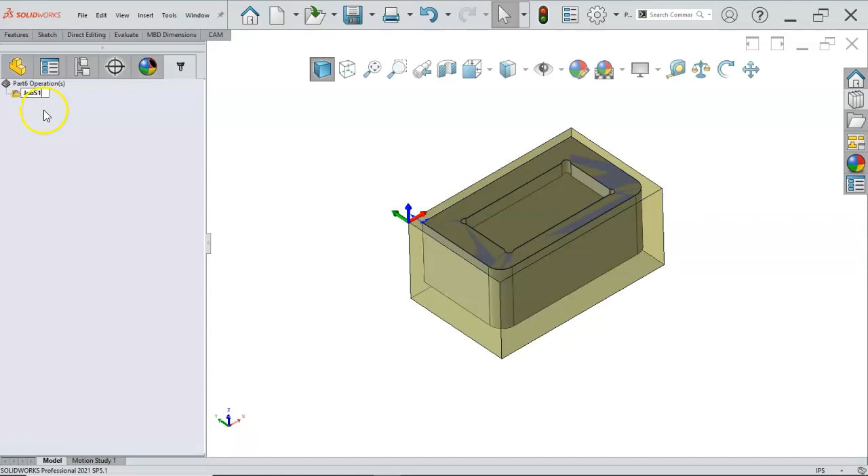Now that we've set up the job, I can have multiple jobs. If I had geometry on this side, I would set up another job. When I go to remove the material off the bottom, I'll set up another job. And if I know that I'm going to have multiples, then I may just go ahead and say that this is for setup 1.

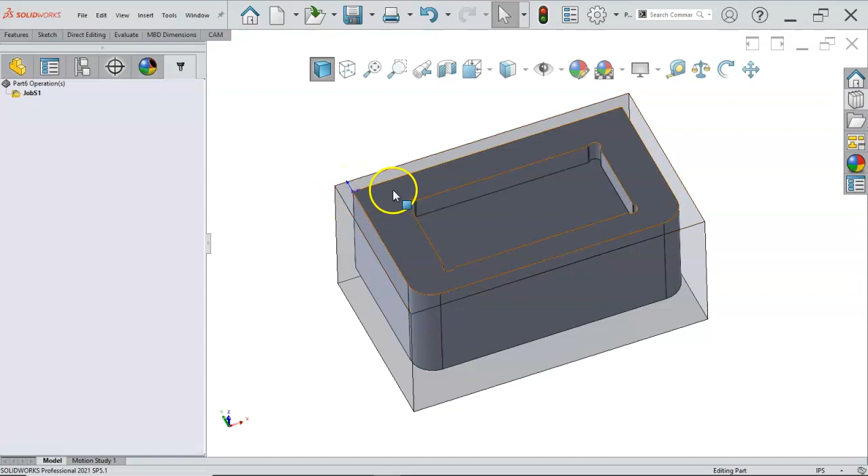If I am dealing with a lot of material or a special case, I would offset this sketch or change the direction so that there's material above. A lot of times we're just taking 5 or 10 thousandths off the top to clean up the face. So we'll deal with that stock and material as needed.

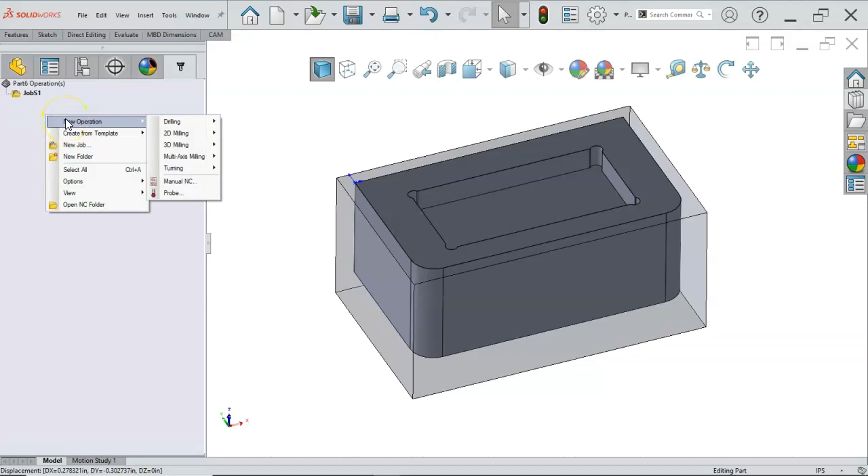Really, the intent of this introduction is to give you a sense of the process. I'm not going to go through every step on creating every parameter for these programs. So just up front, once we get to more of a programming situation, then we'll talk more about each of the settings.

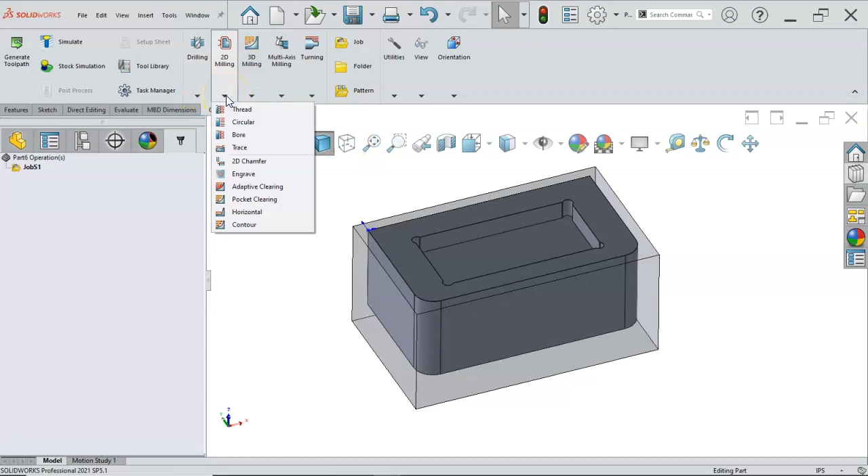A new operation and 2D milling going to the face is the same as going up to the CAM, and 2D milling and picking — well, probably covered it up because my command manager is set to expand, so that's kind of interesting, or not. All right, so that's maybe something that will need to be addressed.

I don't see the rest of the operations. So we'll go into the face, and you can either preset your library from the CAM as you go, or if you already have libraries, they will be showing up as a base. So if I wanted to use my VF-VM library, I would just grab all of these, copy it, and paste it into my part.

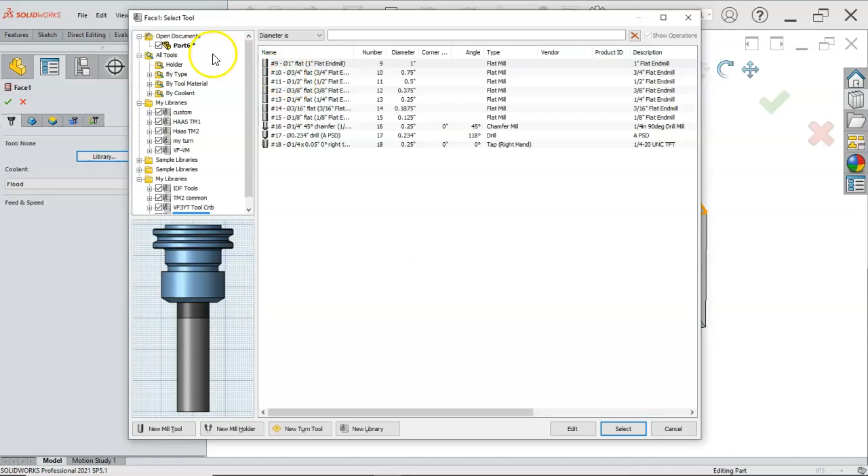Since we're just setting up for some basic operations here, we'll do a flat end mill. Way too much is available because all of the sample libraries, or quite a few — yeah, all the sample libraries on the last load are active.

So I'm going to see 5 or 10 of everything because we have inch for various materials, which should set the speeds and feeds. But if I create this library for mostly aluminum or steel, then it should have the speeds and feeds dialed into it as well.

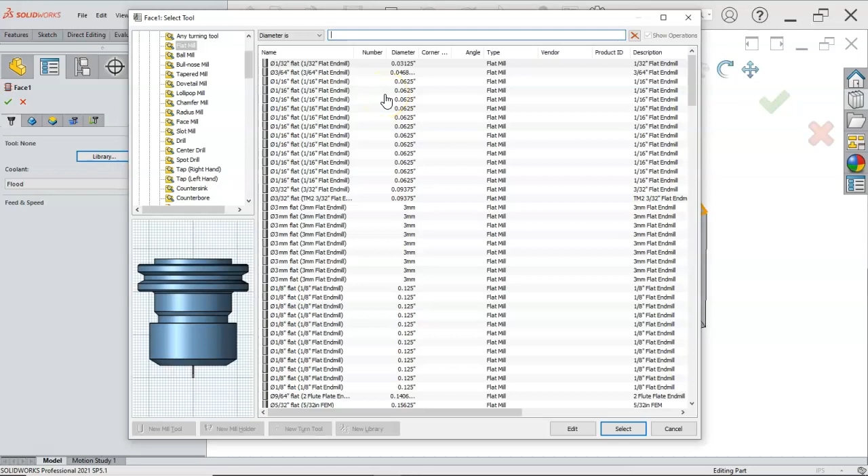Depending on which program you're using, the software has different strategies for managing those numbers. So let's see, diameter is — let's go with 3/4 inch, so 0.75. I'm just going to grab the first one here and select it. It's going to put it into my grouping.

If I wanted to make this a local setting for this program, I can go back into the library, then tool 1, flood, carbide, 3/4 inch end mill, cutter sizes, lengths of cut. Since it's a little bit longer, that's going to generate an error.

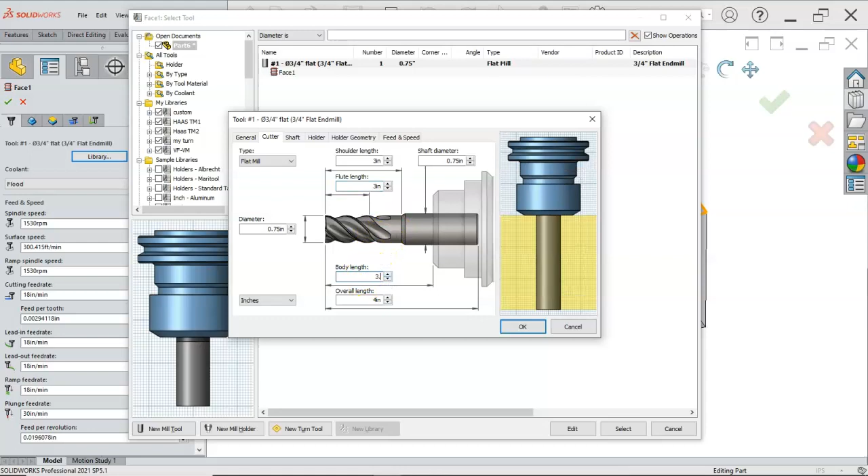So if I go to 3 and 3.1, and then the feeds and speeds, we might be able to get to 600. And then your choice — I'm getting less particular about the 2 decimal places. It shows up on the control, but it really isn't hurting anything.

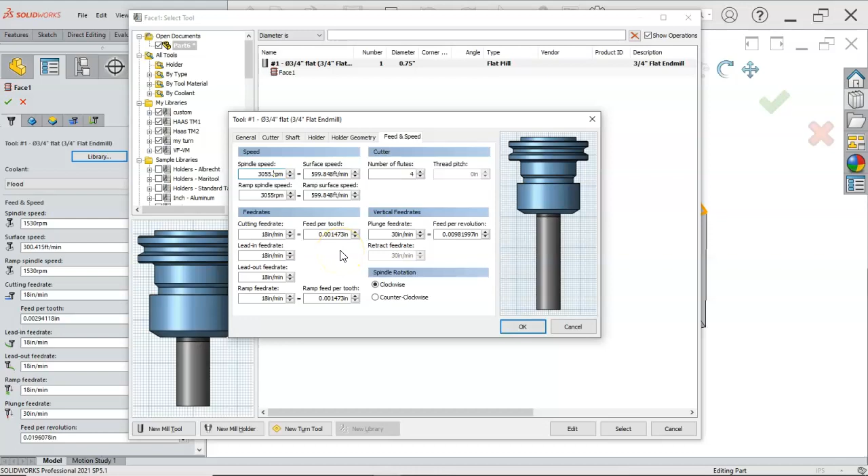And the feed per tooth at about 1.5 thou, it generates 18. That's maybe a good starting point. I'm pretty sure that I can run this tool at 30 inches a minute.

I'll leave the lead in, lead out, so that I have a little bit of a safety factor. And the ramp feed rate — I can override those at the machine if we really needed to. I'm not going to be doing any plunging, but if we're in a situation where it plunges... and then this will end up being a 3 flute, so that changes some of those numbers.

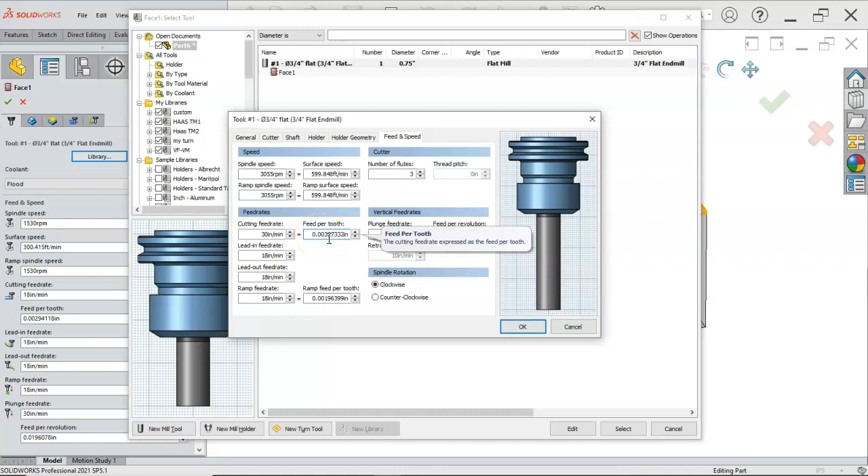If I go 3 flutes times feed per tooth, that adjusts the current feed rate, and now we're at 3 thousandths feed per tooth. And yes, we'll update the current — when I select it, I'll see these numbers go, and anytime I use that tool, those will now be the defaults in this program.

If I wanted it to be global, I would end up writing it to my tool list — or, well, I think the standard tool lists, the system tool lists, are protected.

One of the things going on here with these numbers is, again, you have quite a few selections depending on how you like to work. This is set up to where from the top of the model is added 200 thousandths, from the model top 200 thousandths. Depending on what this is, it's basically a logical operator.

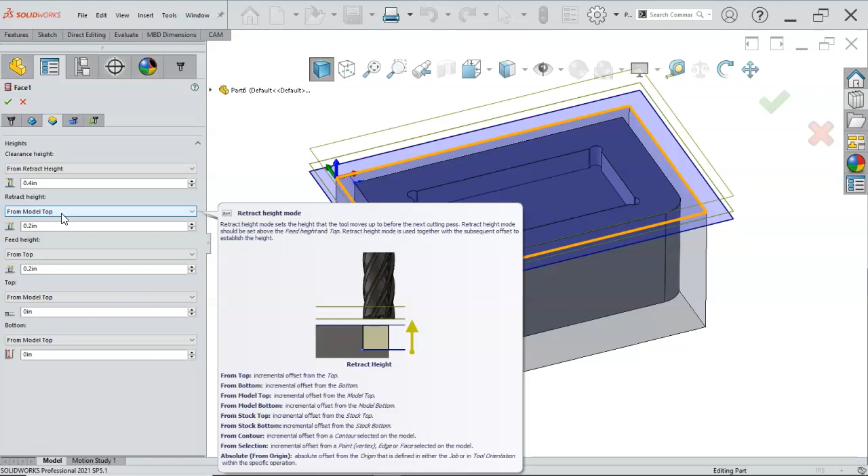It's saying that we have the model top, the feed height will be at 200, the retract height will be at 200, and we can modify those depending on what we're trying to accomplish, and based on the selections. And then the clearance height is 400 above the retract height.

So we'll see the tool come down to 600 thousandths, have a little bit of a pause, feed to 200 thousandths, and then plan its lead in. So if there was more material here that we had to contend with, then I might want to deal with the retract height as the stock top instead. But since they're the same at this point, then that works.

In our cutting, it will be at the top, and the bottom, the cut depth, will also be at that 0 plane wherever we establish that. And at the work coordinate in the control, I'll step it down 10 thousandths or some distance.

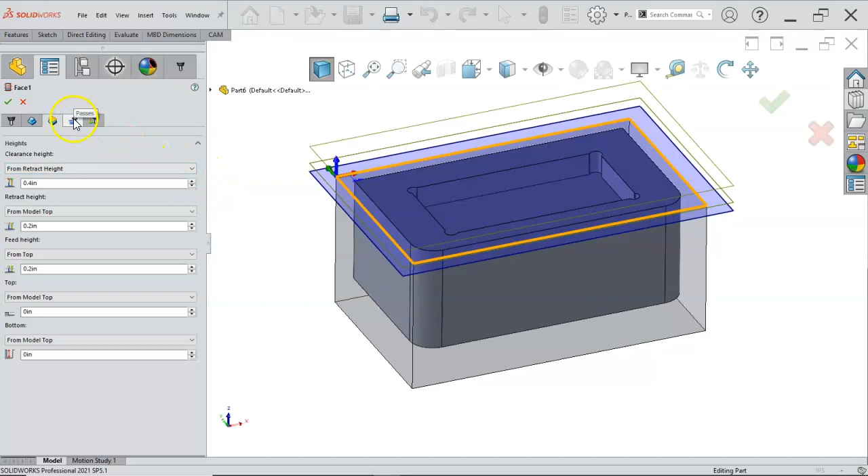And then the facing operation goes to 90% step over. And depending on the machine and whether we're roughing or not, that may leave a good finish. It may also generate some waviness.

So when we talk about the flatness, parallelism, also our surface finish of how fast when this is turning, what the surface finish in microinches is going to be. And as this tool moves across and loads and unloads in both directions, then that's what's going to generate the waviness. So maybe I'll go a little bit over half and do 400 thousandths, and that will reduce the waviness at least some, and then we'll have to determine from there.

All right, so the direction by default will be 0 degrees, and depending on what it feels like, it may start on this end and go 0 degrees, or on this end 0 degrees, depending on the orientation of the model.

We have a visual as far as the direction, and then how much over if we need to run the pass. So if I did not have the stock and I was just dealing with the part, but I knew I had maybe 100 thousandths over, I could extend the pass, and I can also extend the stock.

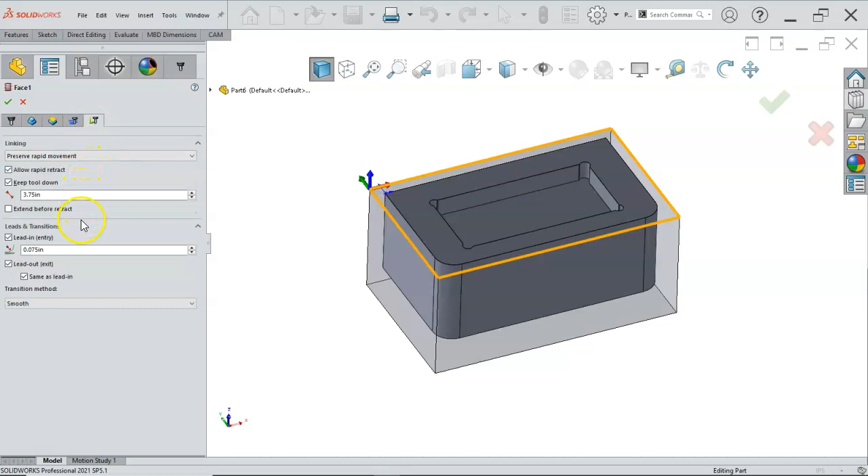And then directions, climb conventional, or both ways. And then pretty much how is it going to lead into the part. And since I started at 200 for the retract, I go ahead and set the lead in.

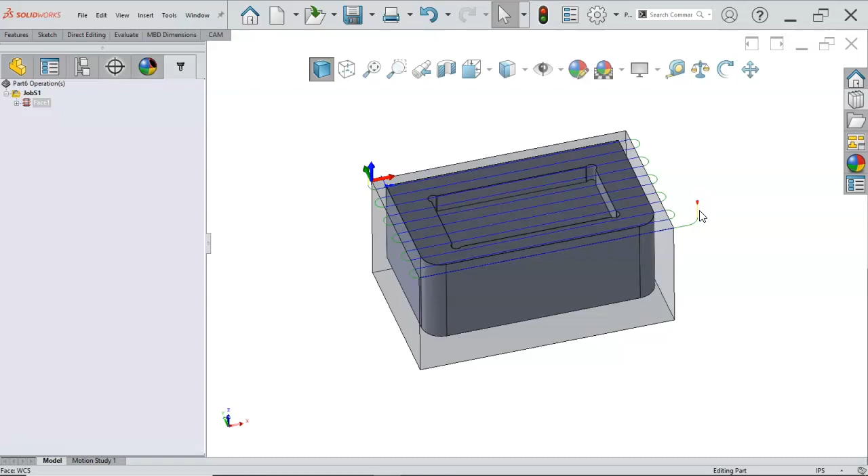So one of the unique things, as far as programs go, that HSM does is it switches from G17, the XY plane, into G18 or G19, the XZ and the YZ, and generates a 3 axis move to make this kind of arc lead in, which is nice, a little strange to get used to, but it kind of does the same thing as a ramp.

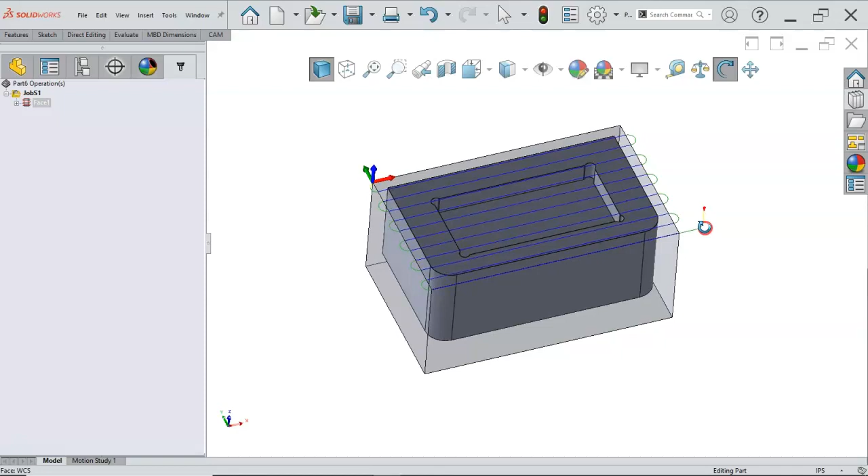All right, so I'm going to hit the tab key and hide the stock. And we have a facing operation that's going to establish the top. And then we need to come up with something for removing the material around the outside.

So all of my speeds and feeds, I may come back and adjust the ramp feed rate if that is too aggressive or not aggressive enough.

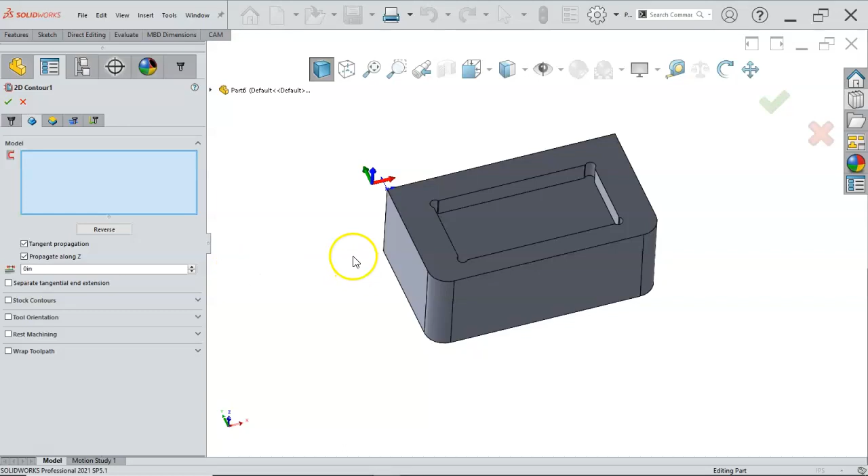And then because of the associativity, I'm picking the bottom of the part. You need to pay attention to the arrow because right now it will cut the material out of the center, so I'll be reversing that.

Tangent propagation and propagate along Z are going to determine if it goes all the way around or follows the radiuses.

And then the height, and I believe I've changed these to where I'll have a 1 inch clearance and then 100 thousandths and 100 thousandths, so basically 100 thousandths above the part for it to start its lead in. And then 0 from the model top, and at the bottom we'll go based on the selection.

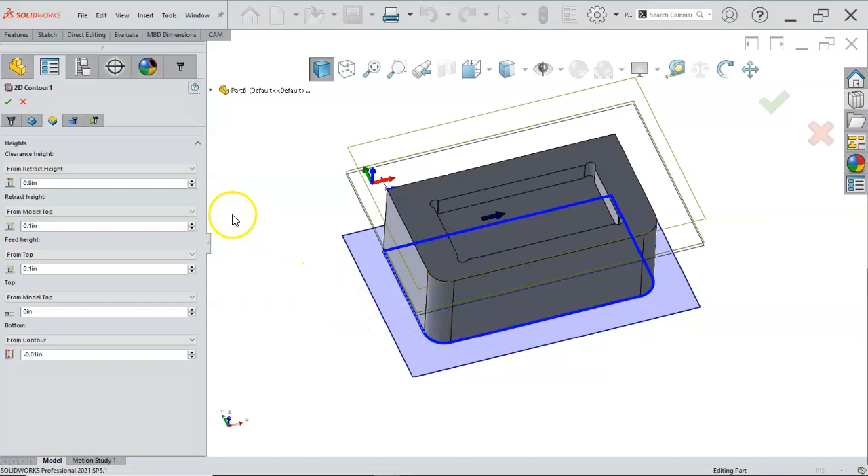So I wouldn't want to pick up here because from contour would only take a little bit. It'd be much like the facing operation. But since I picked the bottom of the part, I want to go maybe 10 or 20 thousandths past to make sure that when I cut off the material on the back side that I'm not generating an aluminum or steel razor blade there, that it will actually remove some of that material.

All of the systems are going to have some method of managing cutter comp, so compensation and variations in the tool. If we go in computer, it will plan a 0 tool diameter and determine where the tool center line is.

In control, you have to set the value, and it's basically programming to the edge of the part, where it's inserting the G41 and G42s to actually call cutter comp at a 0 tool diameter or tool center line, and then using that small variation to control the size of the part, so we can get very accurate, very close tolerance parts.

Multiple finish passes. There is quite a bit of material there, but I'm not going to plunge the tool and go around in this case. So I might want to repeat the finish pass, just let it take a spring pass because of the length.

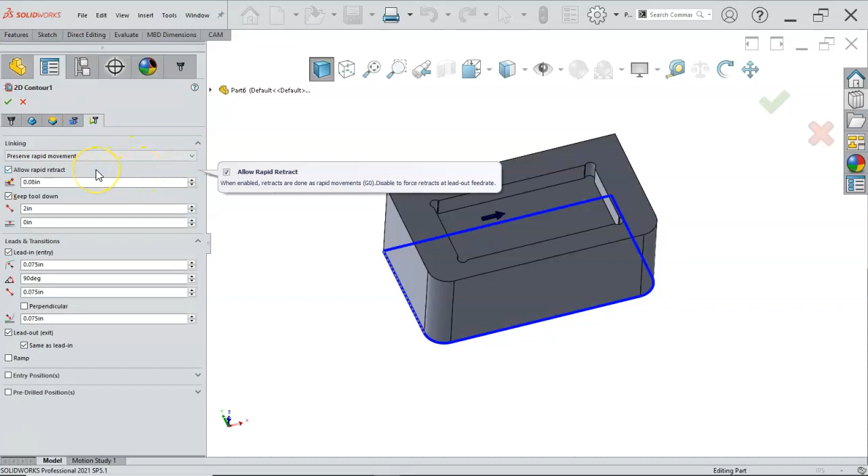Coming over to the defaults: rapids, keeping the tool down, lead in of 75, and lead out, which is fine, and then a ramp. So 3 degrees, or sorry, 3 inches, 2 degrees and 3 inches means that it's going to try to go one loop around in the part, which is pretty aggressive. Even if I was stepping in or stepping down, I would not be that aggressive.

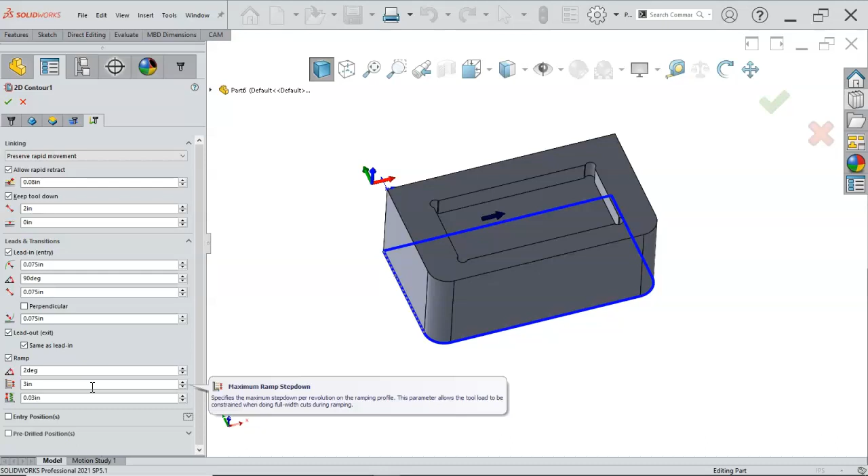So we do want to see what it looks like. I like a little bit closer for the start, so I'm going to put in 30 thousandths, then we'll take a look. The 2 degrees means it will take 4 passes, and if that is too aggressive, then I would look at possibly a maximum ramp step down.

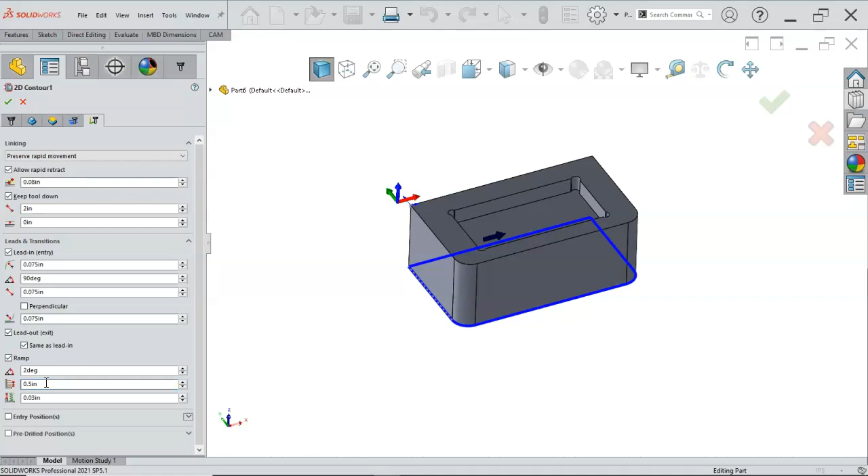It takes either the 2 degrees, I guess the greater of the numbers, and if I were to put a half inch in there, then I get one more pass. So I can kind of control the lead in.

It starts going around. The advantage of the ramp is the tool has pretty much the same tool load throughout the entire cut, whereas a come-to-depth lead in, lead out is going to side load the tool as it engages. Even with ramps and the other stuff, it's going around, leading off, stepping down. Having a continuous path is a pretty good way to go.

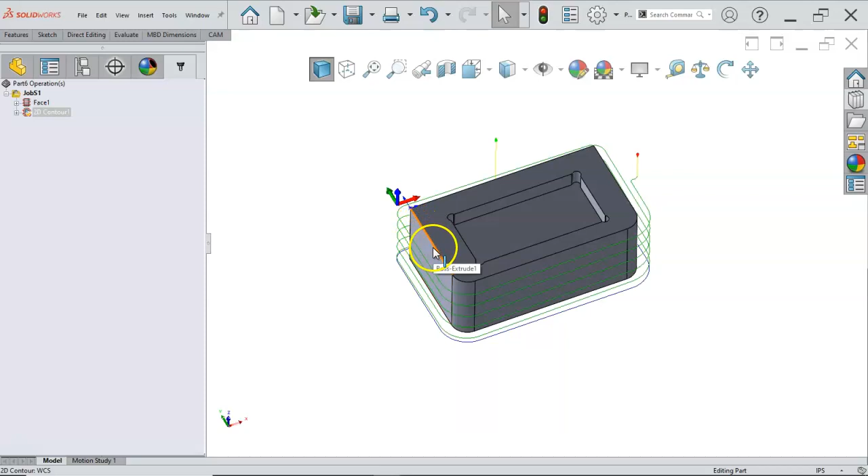So I haven't left any material. I'm going to finish, but I will see the witness marks. So I might want to do another finish pass if it's not critical on the finish, or I could leave stock and come back around to finish up. Lots of options - you're pretty much going to go through and decide what you want the part to look like based on the tolerances and what you're given on the print.

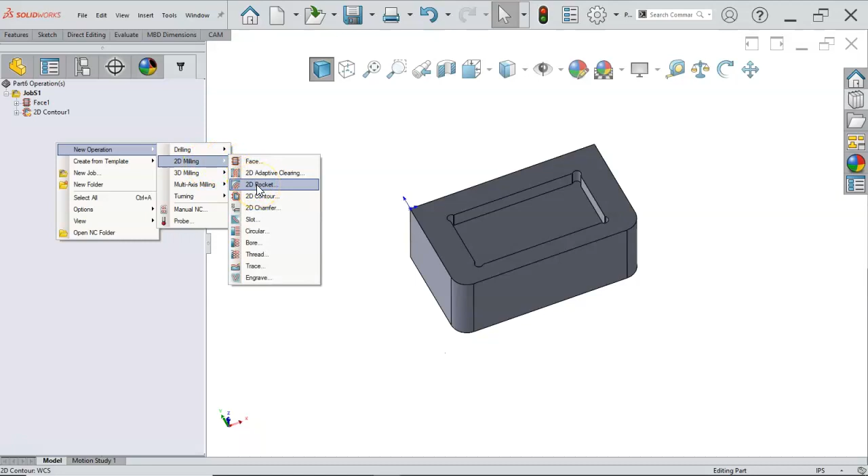So let's move on to a pocket. Pocket's going to be a standard - we'll take a look at the adaptive clearing. So I set this at, let's see, 0.25. We'll pick one of these.

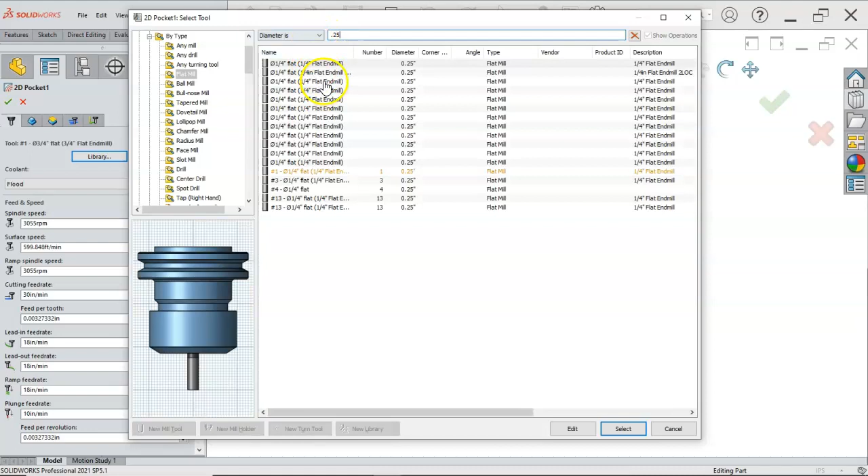If I stay with my 600 surface feet per minute, which is pretty close - if I don't have a 10,000 RPM spindle, then the control is pretty much going to ignore this number. So I'm okay with a 10,000 RPM spindle. 18 inches a minute should be pretty good.

So we go through and we would adjust these - the plunge feed rate and the ramp feed rate, that should be okay. We're going to plan for a helical spiral in.

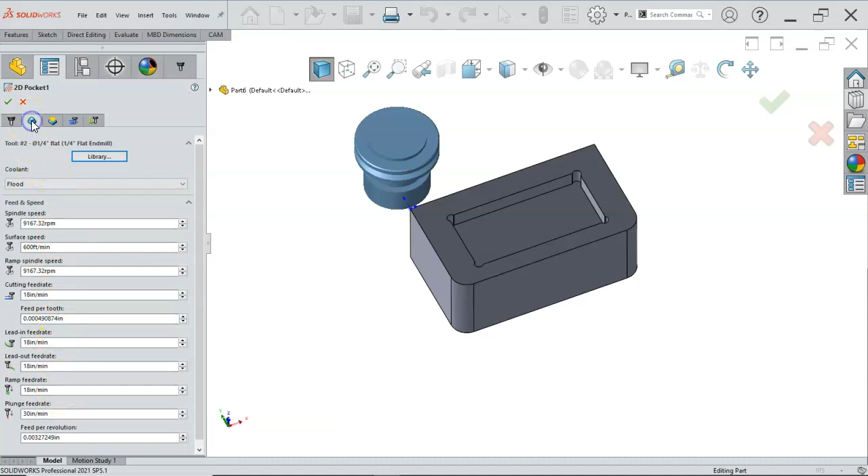And this is where those little radiuses in the corners came in handy, because the propagated along Z will find its way around, but if it was only a partial, or with the tangent propagation, then it would find its way through. The arrow is on the wrong side.

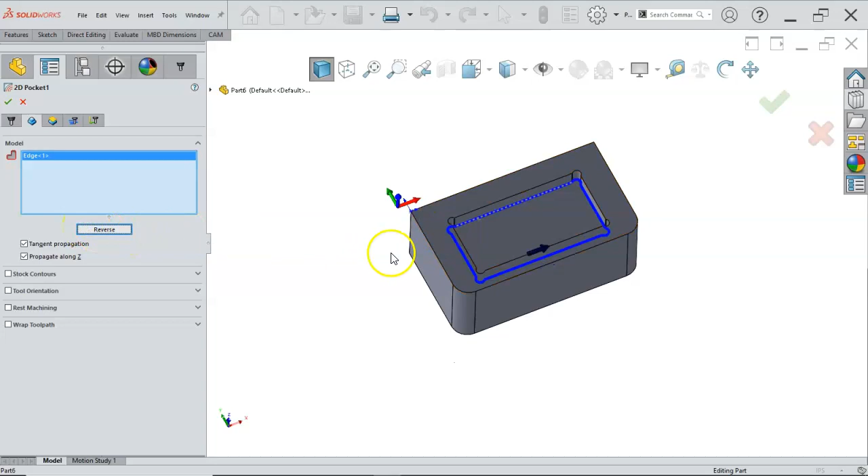Well, on a pocket it's all internal, so the question is, which way do I want it to finish? This may conventional cut on the interior and then go back and do the finish, so got to kind of check those.

We're setting from contour again, so whatever I selected is the depth, and then we would set the variation from there. Stock to leave: 20 thousandths on the sides. Most of the time it'll be 0 on the bottom unless it's kind of generating that waviness, or I need more of a surface.

And then maybe we'll go 80 thousandths, which would be about a third of the radial engagement. So we'll see what that looks like.

And then lead in, lead out - also, let's see, this is going to be the 2 degree starting from 100 thousandths. I'm going to set that to 300 so it's not doing loops in the air before it gets engaged in the part. And then we could also try and do the finish passes as part of the pocket, but I want to do a finish pass anyway, so that gives me my full width, full depth.

So this first pass is usually the most aggressive and most likely to break the tool. So one of the things we would look at is possibly using this as a finish if we can be more aggressive and maybe have less of a finish with the adaptive clearing.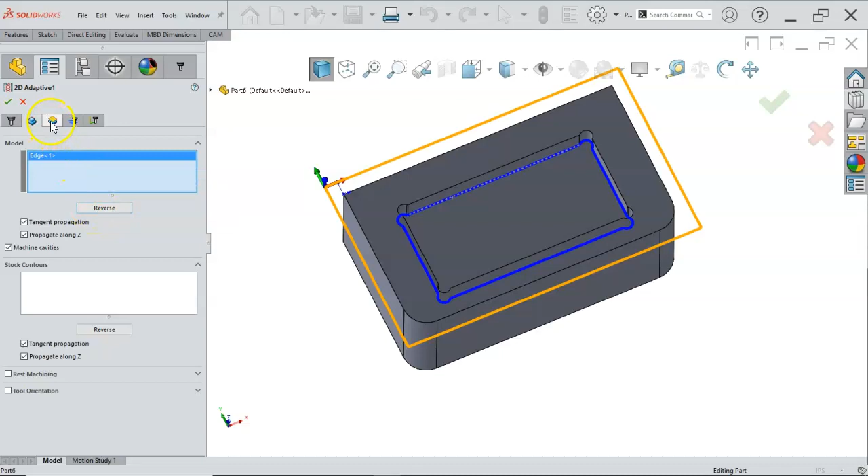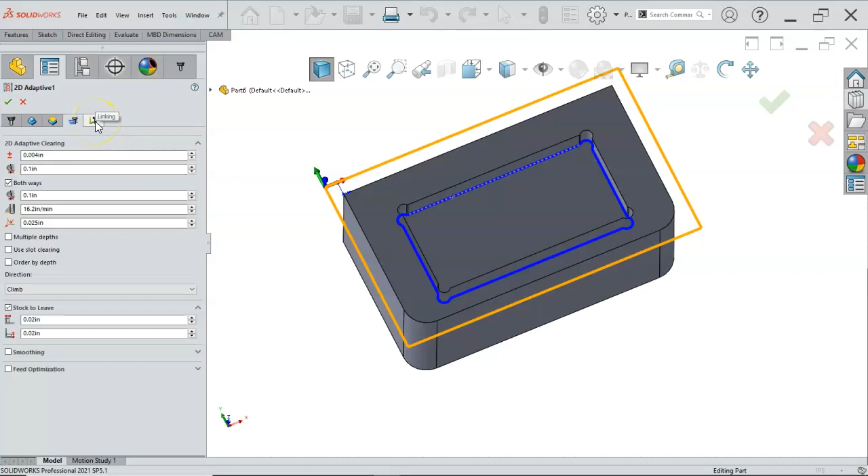So adaptive clearing is kind of a trochoidal cut, which is going to keep the tool engaged, should be able to run at higher feeds and speeds, but we're not going to end up with that full width, full depth first pass. So again, 100 thousandths stock to leave. If I go 20 thousandths on the wall, 20 thousandths on the floor, and we could let it go both ways. And that still determines load, unload, or how it's going to generate that surface.

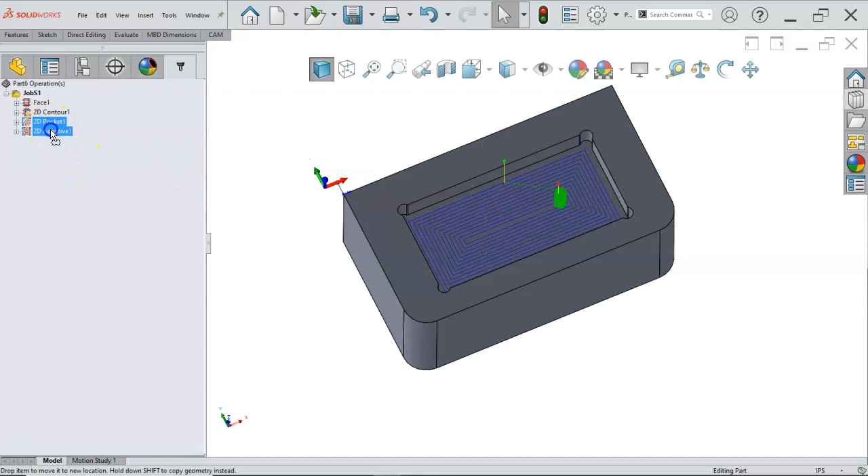The main difference here is that we're going to see a lot more code. It comes back and forth, makes a few maybe weird jumps, but the tool is evenly engaged across the whole cut. If I want to change the order of the operations, we do something like that, and then last we'll do the finish.

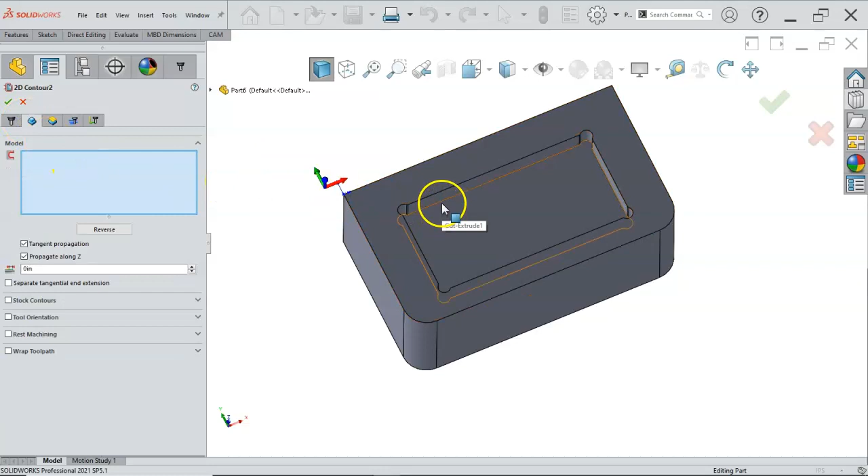So a 2D contour, staying with the tool. I suspect that it will chirp a little bit in the corners, so we would have to address that with the feed rate. And again, checking for the arrow. I want to reverse, go on the inside. We'll find the lead-ins. Those are all looking good on the height. And once we've set these and set the defaults, then we'll be able to just verify those.

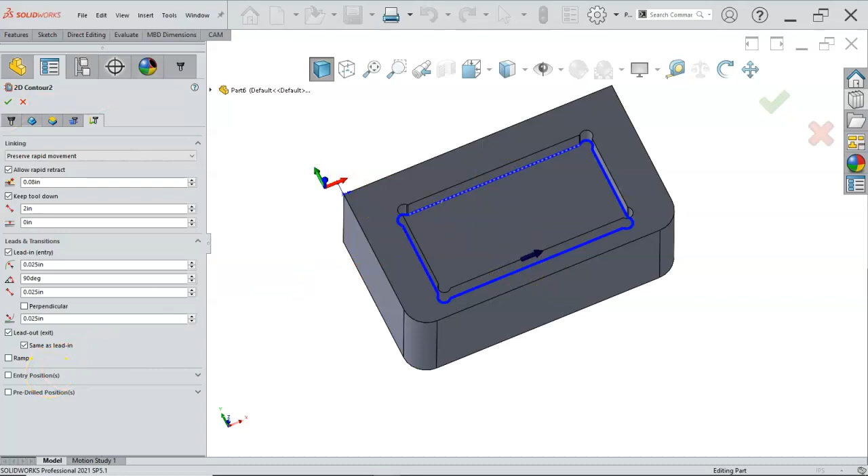And then the wear to initiate the G41, G42, and the lead-in, lead-out. If I wanted to set an entry position, but chances are it's going to start in the middle and create the geometry. And then last would be a deburr operation.

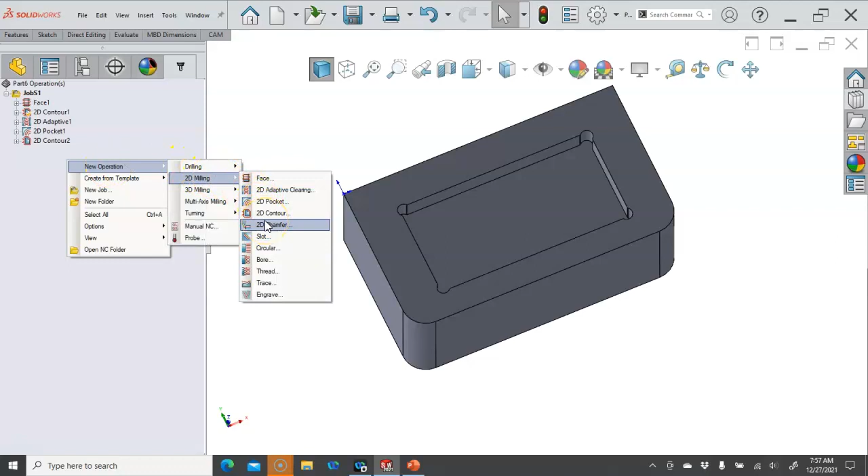That I could set up as a chamfer. And most of the time, if I am just doing an edge break, I will use the contour operation. The contour makes a little more sense to me, that I haven't quite figured out the chamfer tool with an existing modeled chamfer, so it's like anything else, you get used to it.

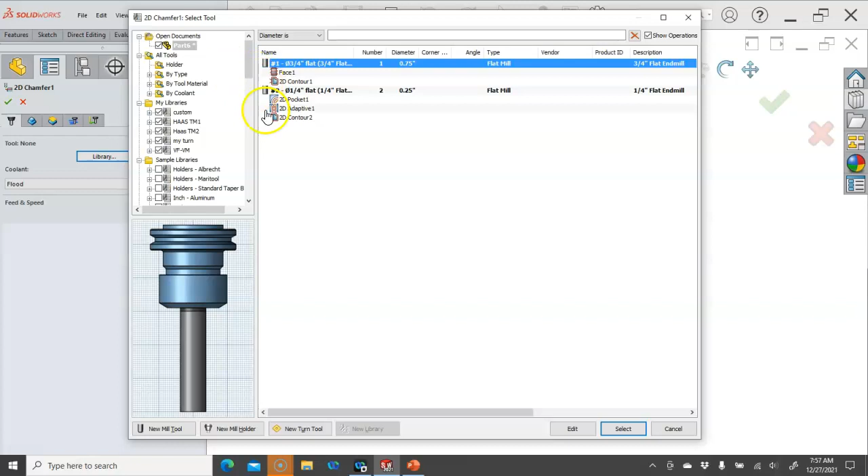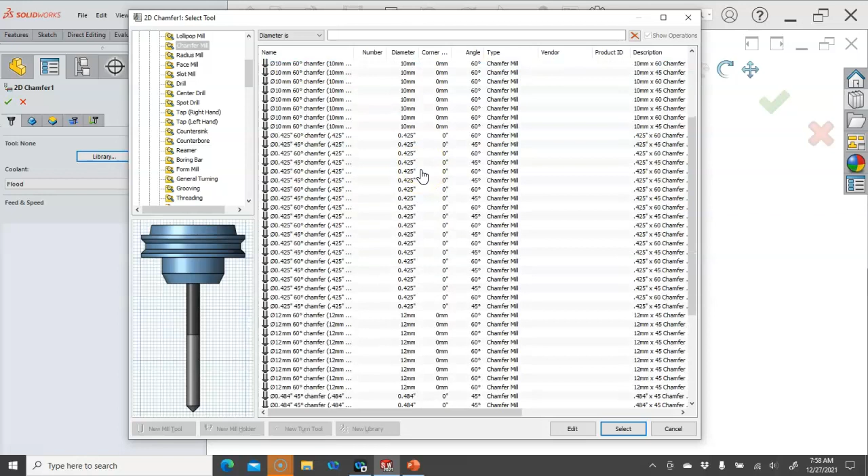And so for the part here, we're going to go by type. We could set it up as, let's see if we have a chamfer tool. And probably going right past a chamfer mill. All right, so 1/4 inch by 45 degrees. If I didn't have the right size, then I would create one.

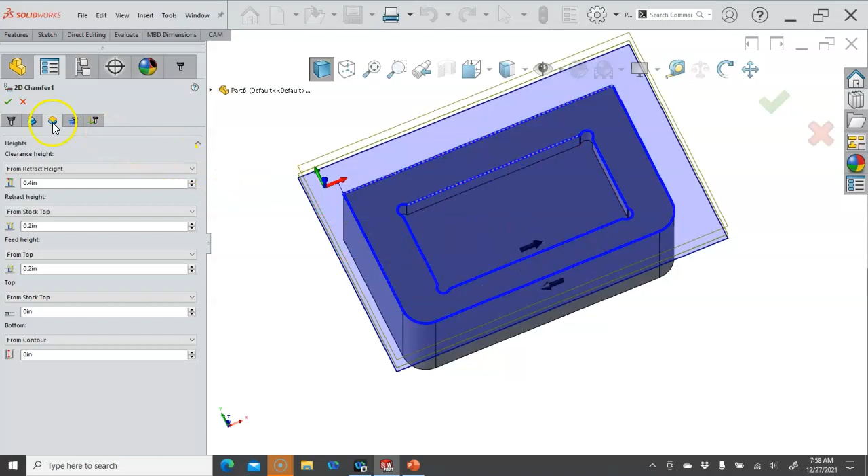Stock top is fine for what we've generated. Otherwise, I would switch it over to model top. The depth - so let's see, the chamfer width. I want about a 10 thousandths chamfer, and we'll go about 40 thousandths. So I should see the tool going to a depth of 50 as it figures out how to go through that cut.

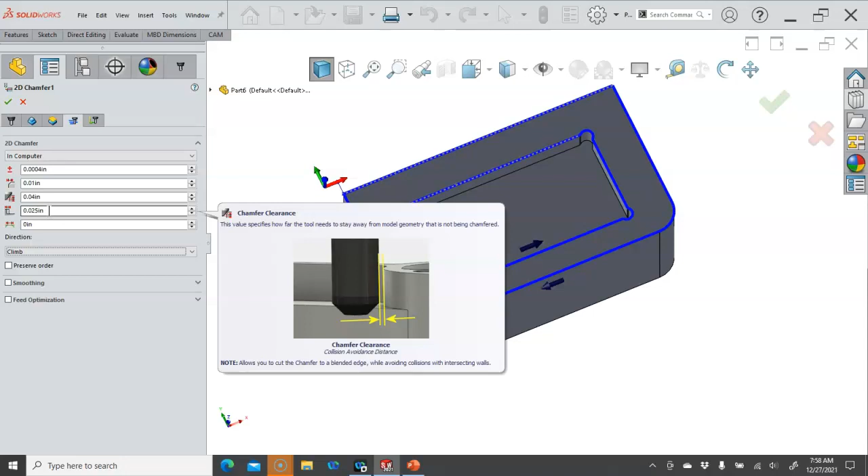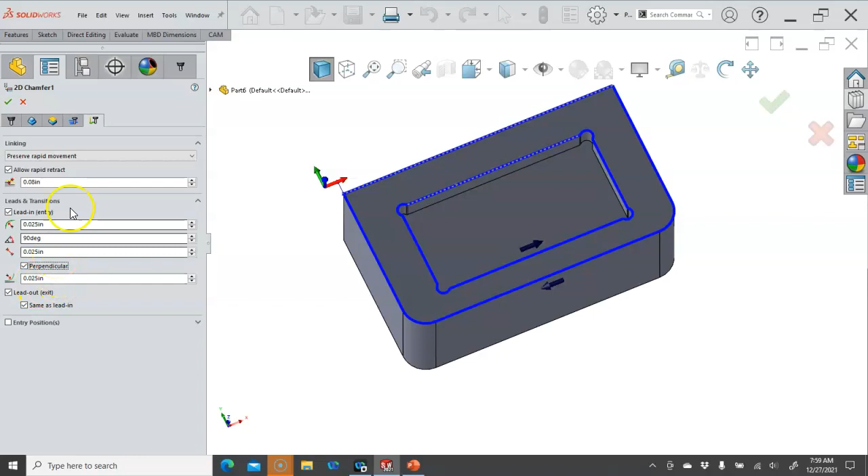And then the closest that it will bring the tool into a possible collision is 25 thousandths, but usually I don't let it get that far. So I don't worry too much about the G41, G42 in computer wear here. I will set the heights out at the control, just using the length in the control. And then let's go with 0.025 on the radius, the arc in and arc around. That usually works pretty good. All right, so that's going to be my edge break and deburr.

And then our process is going to be stock simulation. Make sure that it doesn't do anything too weird. So let's slow that down. I'll turn off the tool and the holder, and could probably go a little faster.

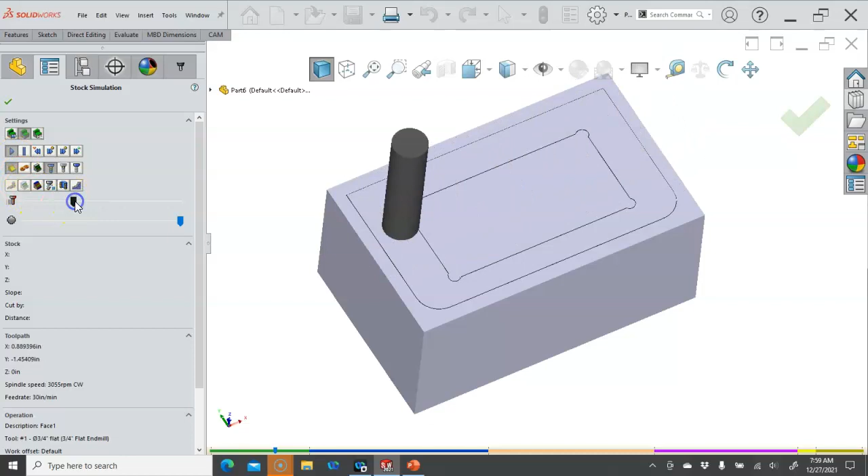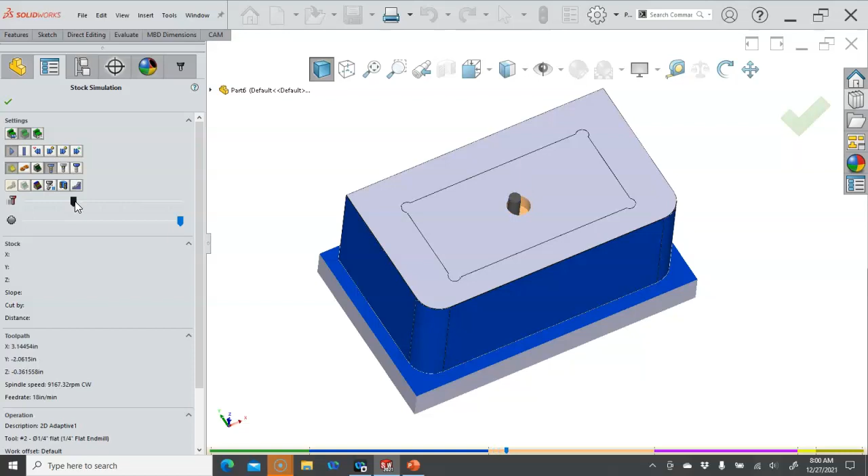All right, so as it ramps down, it's removing the material. It takes one more pass. Ramp in with the trochoidal. You're going to see it make those circles, and this is going to generate a lot of code. Each one of those movements is an XY move.

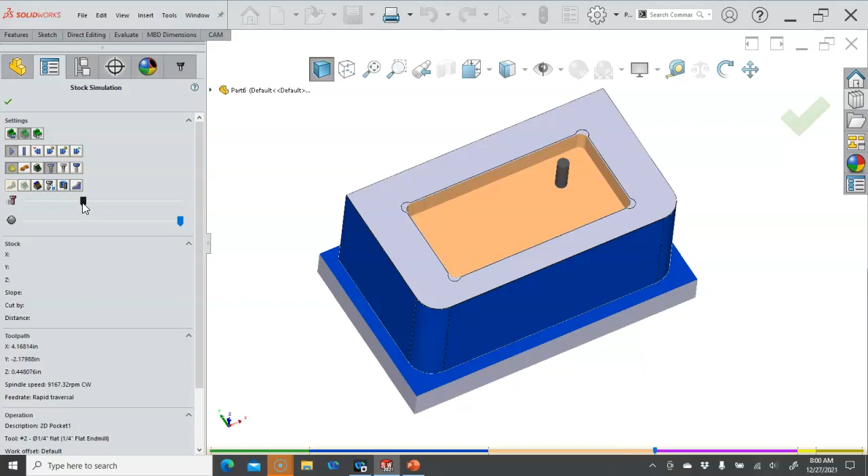All right, and it'll get as close into the corners as it can, and then removing the material on the bottom. Then I'm not as concerned with the full width, full pass on the pocket. And if I step this over a little bit more, I'm going to still have a pretty decent finish and get pretty far into those corners so that I can fit my square peg into that geometry.

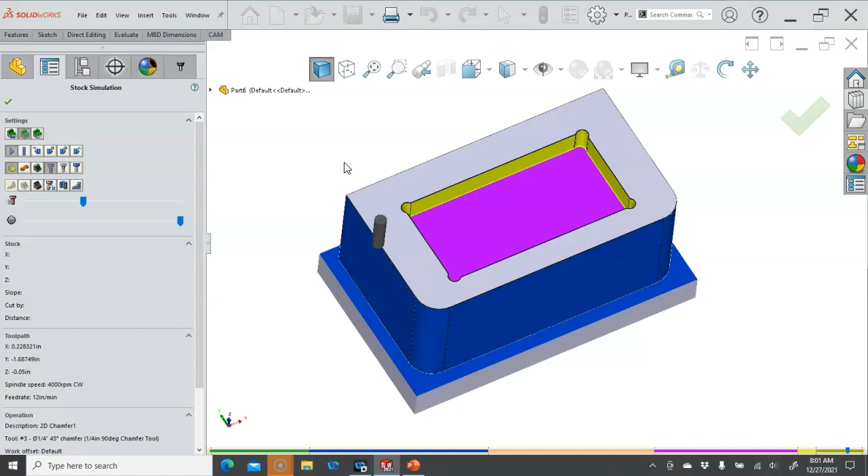So it missed by just a little bit. And then the edge break, and we go back and make the cut. So I'd have to correct a little bit and see what's going on with the clearance for that tool, but that gives me a quick program to make this part.